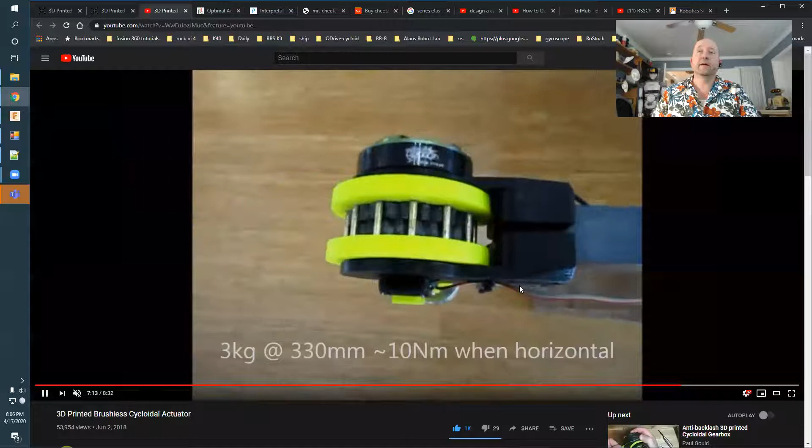And so I've been playing with this concept on and off for about the past 2 years, and then something shiny came along and I dropped it for a while. But this one you're looking at here, this earlier example, with a 12-volt power supply, 5 amps, is able to provide a force of about 10 Newton meters.

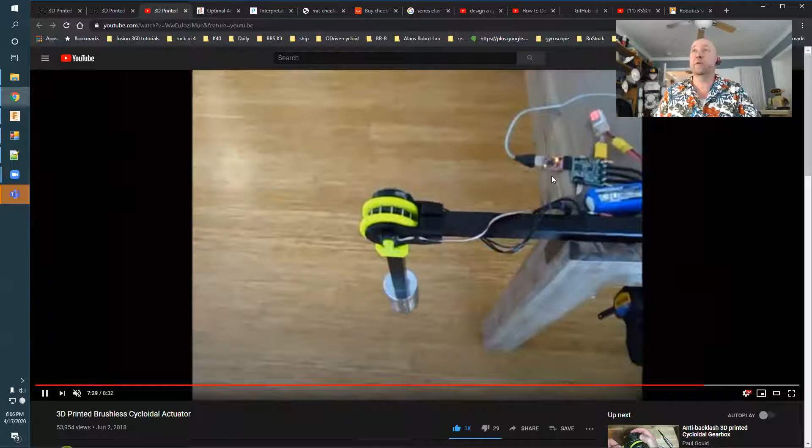And this brushless motor and this cycloidal gearbox isn't operating anywhere near its max. He's only giving it about 1/4 of the total power. And I don't think he's done any destructive testing, but the point is these things are small and potentially very powerful. It sounds like a lot of fun.

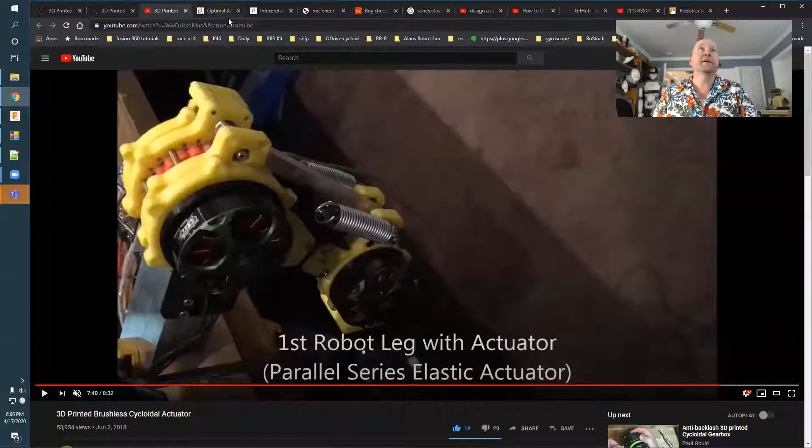So a couple of things have happened since then. This is from late 2018. Boston Dynamics Spot Mini, I'm sure everyone's seen, and it's been on my Christmas list for the past couple of years. And there's another set of people out there, MIT. They've built this thing called the MIT Cheetah. And they've published all of their work, all of their design. I don't know much about the mechanics of the Spot Mini, but they've published a lot of information about the Cheetah actuator.

And let me go ahead and dig into this a little bit. So this is how they're doing it. It's a very wide and shallow brushless motor, and they're a lot more complicated than the normal motors, but potentially a lot more powerful based on their weight and their size. And in this big space in the middle, they put a 6-to-1 planetary gear reducer, just right smack dab in the middle of the brushless motor.

And then they use these aluminum framing components on the outside to mount it to stuff. The entire motor is very narrow and very strong, and really impressive. These are smaller versions of the Spot Mini. I did not think ahead to get a video clip of it for people that have not seen the MIT Cheetah before. But for those of you who have not, it's smaller. It doesn't look to be as complicated. It's more of a project than a product right now, but it seems to have all the same walking capabilities that the Spot Mini does.

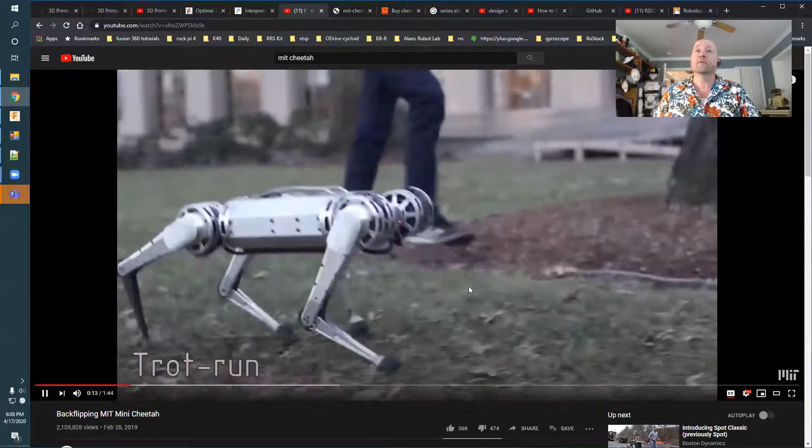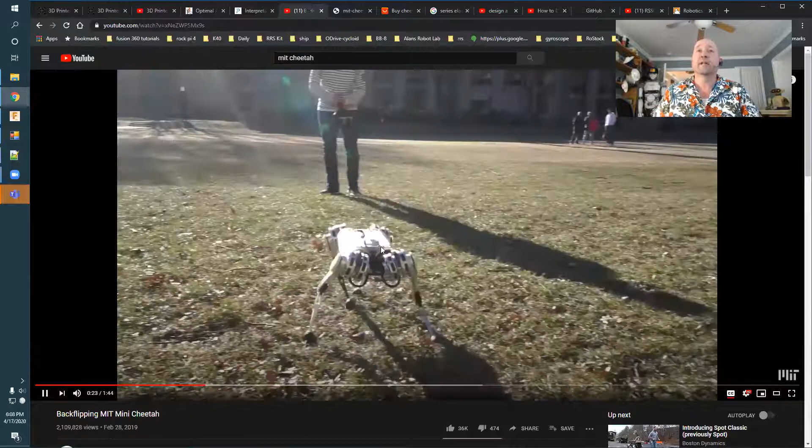So super cool. If you Google search or YouTube search, you'll find some people who are reproducing this. And so this guy's been in various stages of development for the past couple of years as well. Agile, adept, quick, just a lot of fun. And there's some additional papers on how they do what they do. Now, something very interesting came up when they started publishing designs about this, and it's kind of all wrapped up in the same kind of concept.

You want something strong, you want something light, and we've been able to do that since honestly the mid-'80s with standard gear reductions and powerful motors. The thing that has been a lot harder to do is to intuit how much force you're applying. So it's one thing to apply power to a motor and exert a force and have things move around, but it's a whole other ballgame to say, okay, how much force am I applying?

Because if you know the position of something, you can calculate out over time your speed, your acceleration for second order derivatives. You can characterize everything about the motion, but between load sensors and force sensitive resistors, there's really not a lot you can do to identify your static load or how much force you're applying.

And you can approximate it by using a current sensor, but it's inexact because depending on how high your gearing is, and a lot of these super powerful motors have very high gearing, inertia is not the right word, but there's a certain minimum force that you have to be able to apply before that's enough force to backdrive it. So that minimum amount of force represents the lightest force that you could conceivably measure on the gearbox, and that's just the way things were.

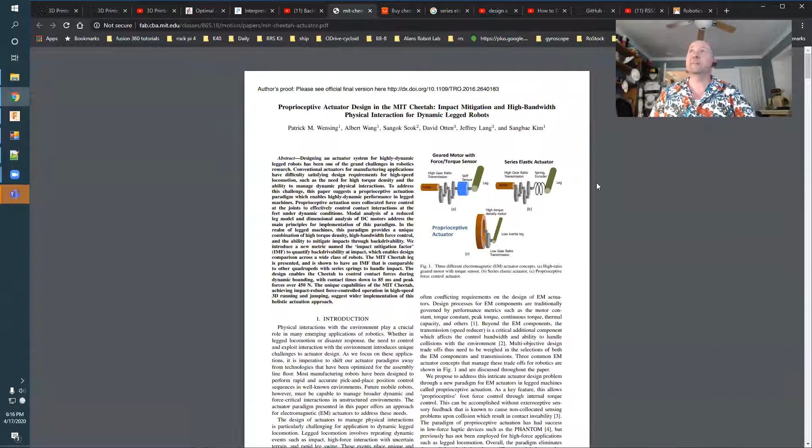It's out of my price range. You need 12 of them to do an MIT Cheetah. And just recently, they've started to sell completely assembled MIT Cheetah designs. So the stuff is out there and it works. It's pretty cool and coming down in price. Still too expensive for me, so I'm trying to see if I can approximate something with 3D printed hypocycloidal gears that maybe won't burn up or melt.

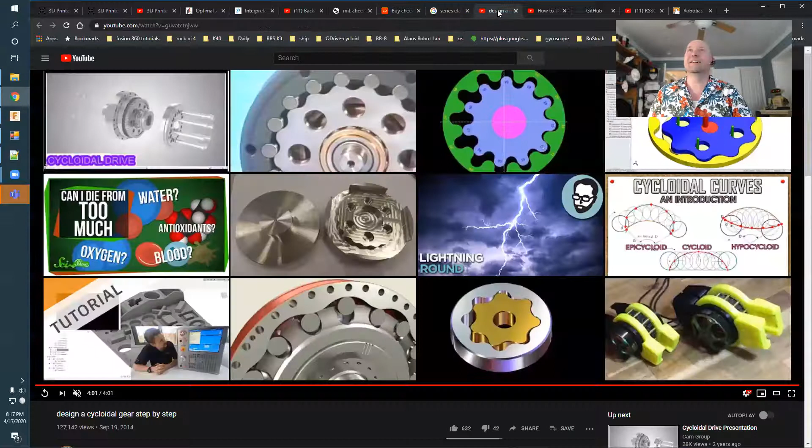Quick question, Alan. Yeah. The MIT Cheetah that you can buy off of AliExpress, does that include the software as well? Is that like a full package? Is that a 100% faithful replication of the MIT Cheetah? Do you know? Oh, they can't deliver to the United States. I wonder why. I know very little about these people that are selling these. I don't want to call them pirated copies, but these aren't MIT approved reproductions.

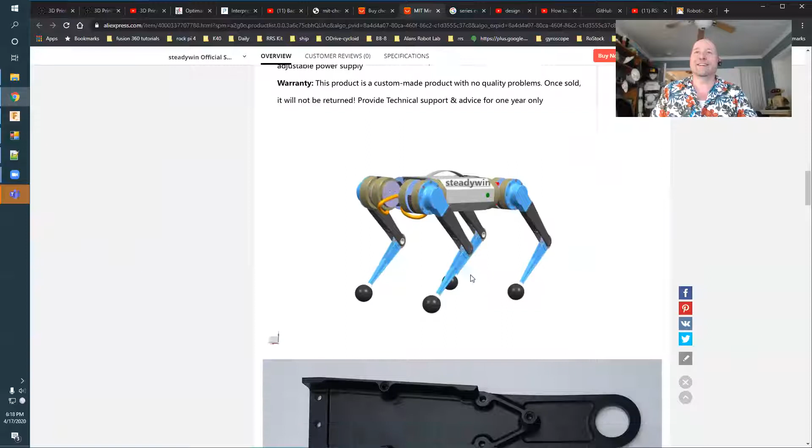I doubt. Oh, there's an operating system on it. So it looks like they're including some sort of software package. I haven't checked up to see what MIT has published on it or what they're doing. Apparently you get one 3,000 watt adjustable power supply. That's pretty beefy. But the manufacturing quality looks pretty good. These are, what do you think? These are cast aluminum parts.

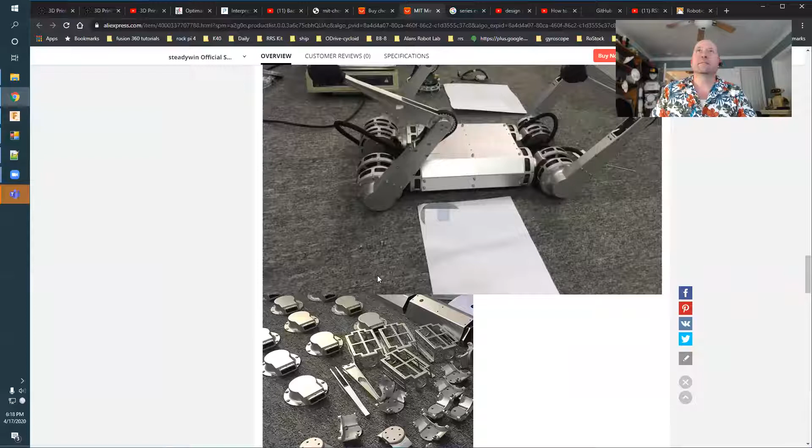So yeah, anyone with a spare 12 grand plus change and can ship to an intermediate country on the way here. I can get it in gray too. That's pretty cool. Have it go to the Cayman Islands. All right. So these guys won't ship to the U.S. How about these guys? Oh, yep, these guys will ship to the U.S. So that looks like so much fun. If I had a spare 13 grand burning a hole in my pocket, build your own robot. It's a knockoff, but the quality might be reasonable. All those parts. Yeah, it looks pretty good.

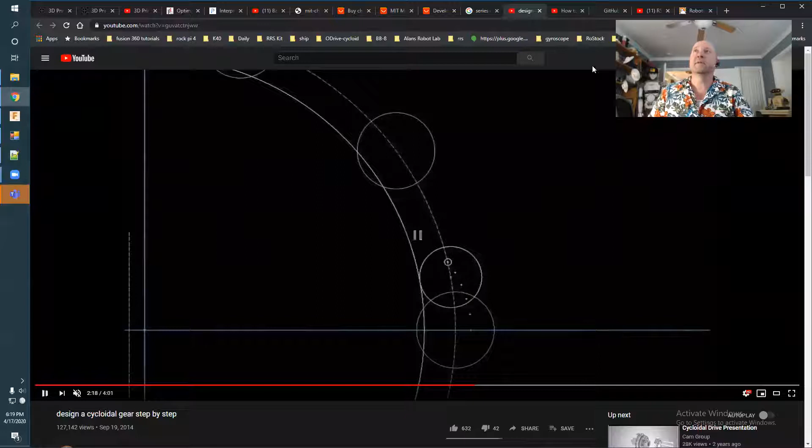So with all that as a background, here's why I'm doing what I'm doing today. There have been other people on YouTube and instructions on how to design hypocycloidal gears, either by recreating the hypocycloidal path and then plotting that out over time, or using some stuff in Fusion 360 to do that. So I've done both of these, and I'm not going to bore you with them. They're super tedious, but they work.

When I was watching this guy's video a few weeks ago, in the comment section, someone came out and said, hey, why don't you just use the cycloidal gear solver on GitHub? And the comments aren't coming up right now, so we'll skip that part. And lo and behold, 4 years ago, someone wrote and published a cycloidal gear generator in Visual Basic, I think. And so what I did is I went ahead and grabbed that.

And sure enough, you can plug in all these different parameters, the roller distance between the center of the gear and the outside, the number of teeth, the radius of the rollers, to create a hypocycloidal gear profile that you can then import as a DXF file. Super awesome. So now I can think, right? So I can go in and say, okay, what would 10:1 look like? What would it look like if I increase the diameter by 2 millimeters?

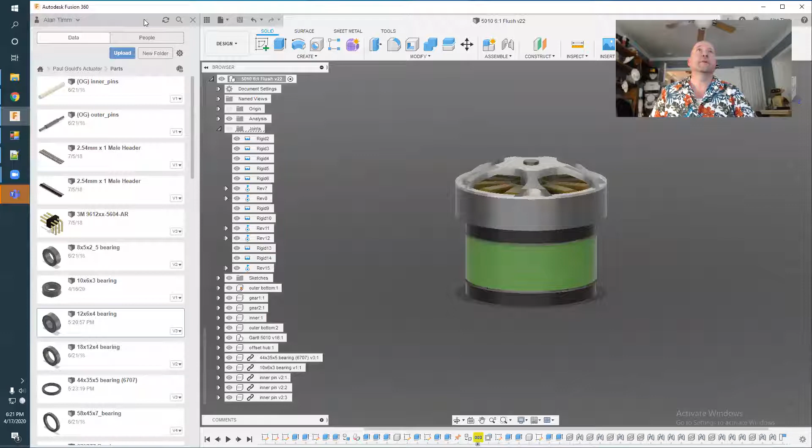Instead of plotting it out over the course of 30 minutes every time I had a change, you can just use the calculator and then export that solution as a DXF. I'll just save that one as RSSC. So far, so good. Love that. Now, on the Fusion 360 side, pretty much all you have to do, and the point of this talk is symmetry, drawing, extrusion. This is just all the build-up to kind of a little window into what I do sometimes.

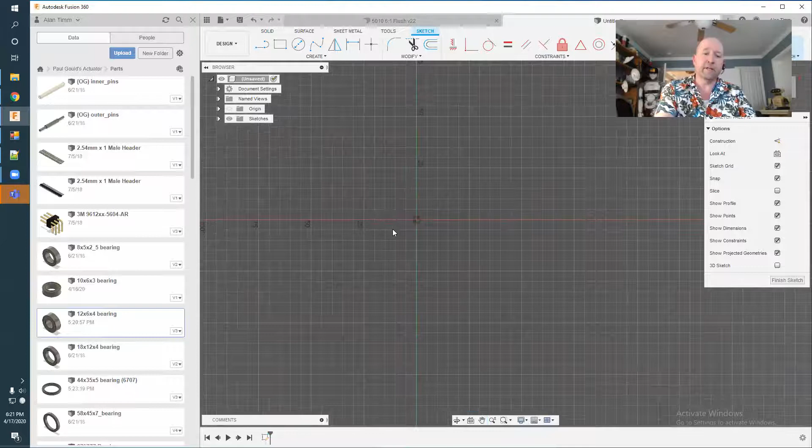Let's go ahead and create a new sketch. Now, just from experience, I know that the reference diameter of my gearbox, let's go ahead and make that 50 millimeters. Let's go to dimension and do that.

Oh, let me show you something really quick. Now, on the screen, can you see my chat? Can you see my video window? Am I moving that to the center? Can you see that? Okay. We can't see your video window, but we can see the video window that Zoom provides at the top. Okay.

All right, so let's do this. So am I front and center now? I should have pinned my video. Did that work? Your video is front and center. Okay. Yeah. Your face is front and center. All right. Small, real pretty.

All right. So to skip to the end first, I'm going to go ahead and move the camera down so you can kind of see what I'm working on now. So this is an example of the hypocycloidal gear that I'm going to show you in Fusion. So this week I did a couple of designs. I printed things out. The tolerances on this one aren't great because I rushed it, but in principle it absolutely works. So let me show you what's going on here, and I'm going to show you each of the components until we get bored on the live stream.

But here in the center, you can see the input shaft. I drew a little arrow with a Sharpie. And on the outside, I drew a little marker so you could see the progression of the output shaft. Now in the middle there are these hypocycloidal gears, and I added in a little reference mark right here so that you could kind of see how all three of these work together. Now this is a 6:1 hypocycloidal gear reducer, which means that for every 6 turns of the input shaft, the output shaft turns once. So we're going to trade by a factor of 6 some speed for some force.

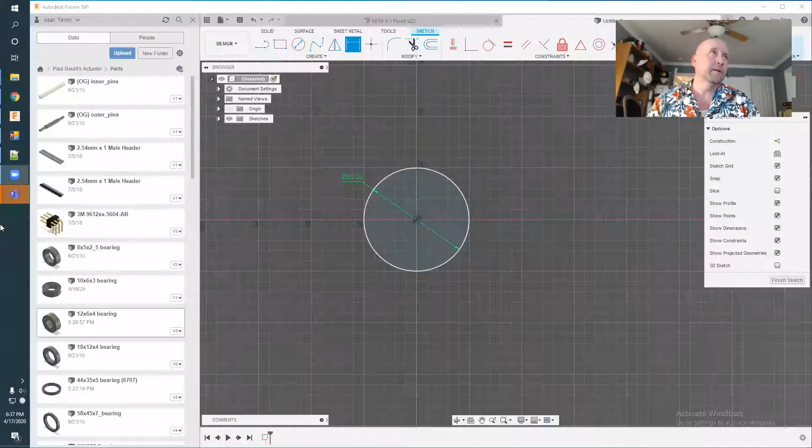Yep, so there's 2 answers to that question. I'm going to switch back to share screen here for a second to show you what I think I know about it. So for just something that looks metallic, we're going to skip to that guy a little bit later. There are a couple of different filaments available that have a small amount of metal embedded into it. They're heavier. They polish up like brass or copper, or aluminum, but they're not really used for strength. It's just for looks.

Let me see if I can find here. Let me switch forward onto this guy. So this is the stuff that you and I would be able to get a hold of. Let me see if I can find an example of an output object. Oh my gosh, the talking head is not going to show us. Because I'm thinking, some of these nanomaterials, carbon-based type stuff, could wind up being very, very strong, but yet maybe 3D printable types of filaments of some sort.

Yep, and there are filaments that have embedded little chunks of carbon fiber, which are very strong and very stiff. But again, it all depends what you're using it for. Let me give you an example. When the carbon fiber filaments first became available to 3D printers, and they're still a little bit more expensive, they were really expensive when they first came out. And they tend to tear up the inside of the brass nozzles for 3D printers.

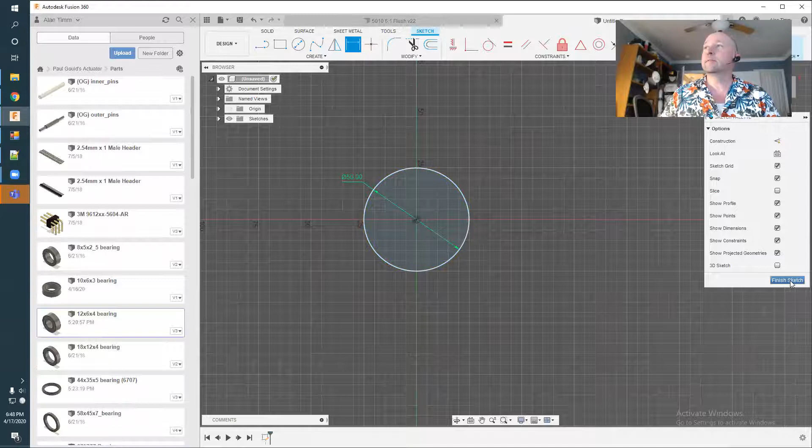All right. So to wrap up the talk on Fusion, we went off on a couple of different tangents. Sorry about that. Let me switch back to the screen here. What I wanted to show you was symmetry, employing patterns in your designs to save time. Now, I'm going to skip forward a little bit on this one. I'm going to say my reference diameter for the gearbox is 50 millimeters. And we're going to call that reference diameter, just so I can remind myself of how big the gearbox is supposed to be.

From there, let me save the design. We'll call this RSSC gearbox tutorial. And I'm going to create a new component. This is going to be for the gear, and that'll be made active. So what I have here is a project, and in that project I've created a new component and made it active. That means everything I'm doing is gear related. It's a way of organizing your work when you're doing something complicated with multiple parts. Now, let's go back over to my gearbox generator.

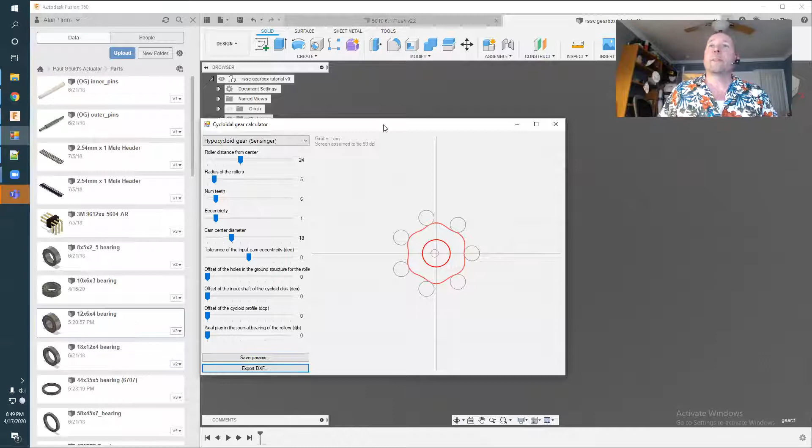Now, this is the gearbox I'm currently working on. These are parameters that I've already set up. From a couple of iterations, I know that I want the centers of these posts to be 24 millimeters away because that fits in my 50 millimeter frame. I know that I want each post to be 10 millimeters in diameter or 5 millimeters in radius.

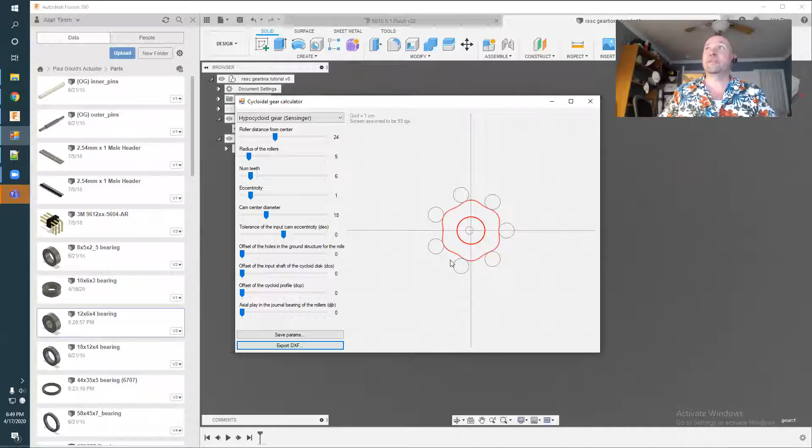It's a 6-to-1 gear reduction, so there should be 7 of these posts and 6 lobes in the gear. And as you change these around, it redraws the gear in real time, which is super awesome to see what these things look like, way faster than going through and hand drawing them.

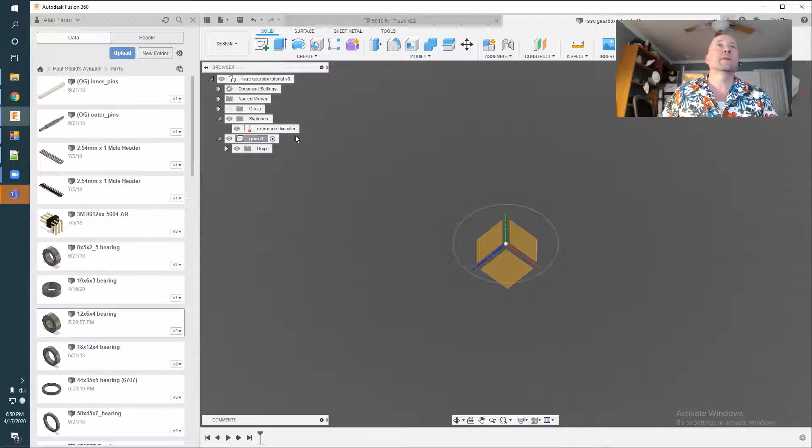So what I'll do is I'll export that design. I'm going to call that RSSC just for sake of the demo. And it's going to export that design as a DXF or a drawing type file. And from there, in our gear, let's go ahead and expose the origin and do a new sketch. And in this sketch, let me move some things around so I can see them over here. There we go.

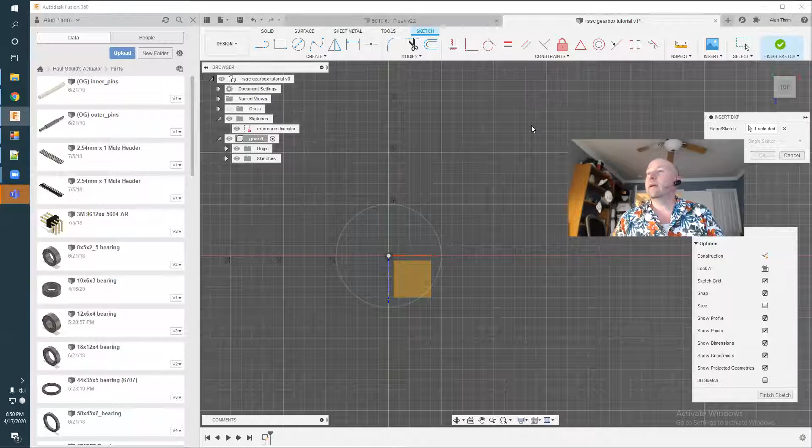We're going to insert that DXF file that we just generated. So I'll go back over here. Hopefully I'll remember where I stuck it. And it's going to pause for a second as it crunches it. There's lots of individual line segments. It takes a couple of seconds for it to import everything. I get a warning that the DXF file is unitless. It doesn't contain units. So I think it's millimeters, but let's see.

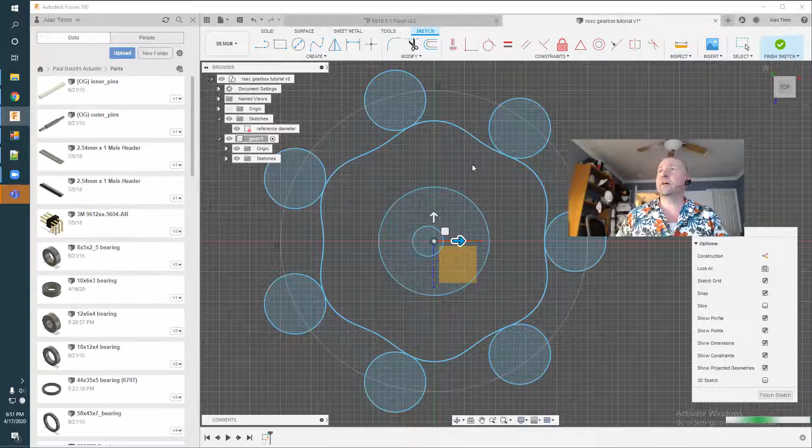And here we have an import of that DXF file. Now I want to point something out to you because sometimes it works and sometimes it doesn't. Now, when you cursor over a closed solid, let's see, I think we want it just like that. I'm going to go ahead and click on OK. And after a couple of seconds, it'll fully import that DXF reference file into this sketch. Now it's still chewing on it because it's a really inefficient way of getting it in here, but this is great because this gets us most of the way of where we need to be.

All right, so I'm going to turn off that reference diameter circle for a minute. Now, when there's a closed shape and you put your cursor over it, it'll change color. That means that this is a closed circle. In theory, we could extrude it and it would be a solid. Fantastic. We actually can't use these because even though they look like circles, they're not imported as circles, so we'll ignore those. But check this out.

When I put my cursor over the gear profile, that doesn't happen. And that doesn't happen because it's actually made up of several thousand small line segments, and there's an open segment somewhere. So I can't extrude this. I can't directly use this shape to design a part to 3D print to create my gearbox.

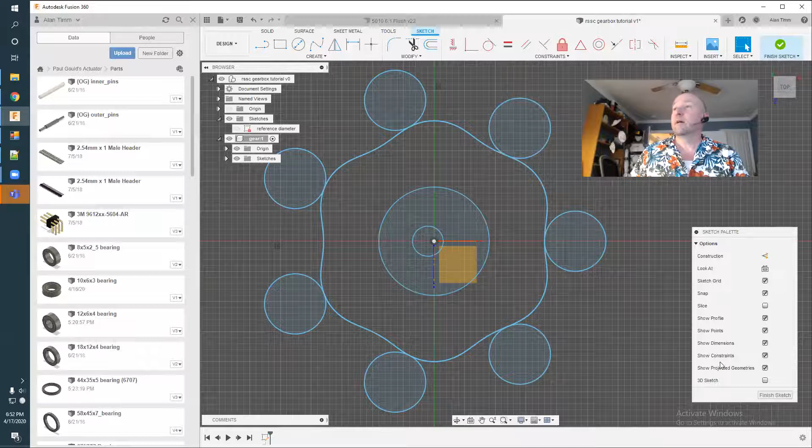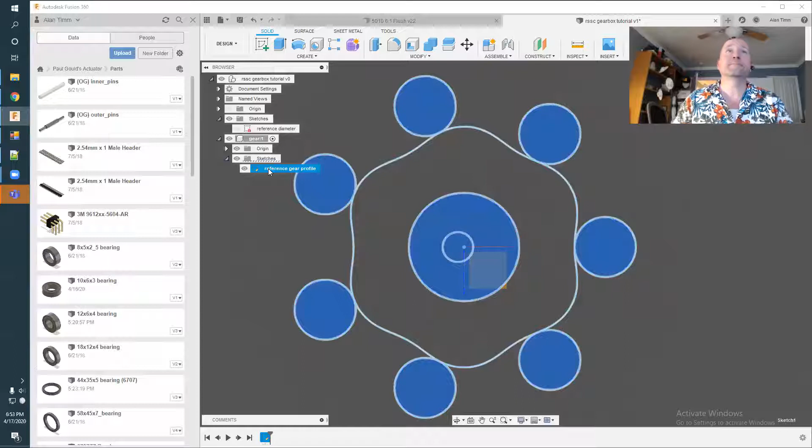But that's okay because we are getting better at Fusion 360, and there's some things that we can do to work around that. So I'm going to call this sketch where we imported that file reference gear profile because it sounds cool. And so that's going to be a sketch underneath the gear. And same thing, you can see that I could, in theory, extrude each of these circles, but I can't extrude the gear profile. So let's talk about patterns.

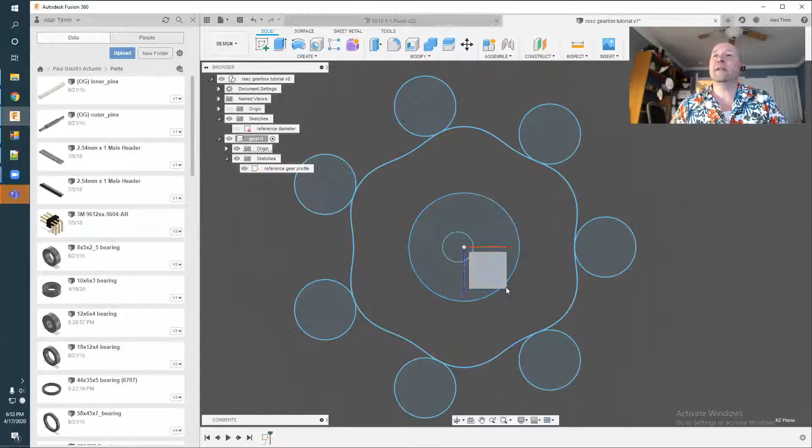Let's go ahead and create another sketch. So this is a different sketch; we'll go ahead and turn the other sketch off. So we have this reference sketch with some stuff on it, and then we have our new sketch 5. This sketch 5 is going to be our actual gear profile. And we're going to use patterns to recreate that gear without drawing several 100,000 points or whatever it is around the entire gear.

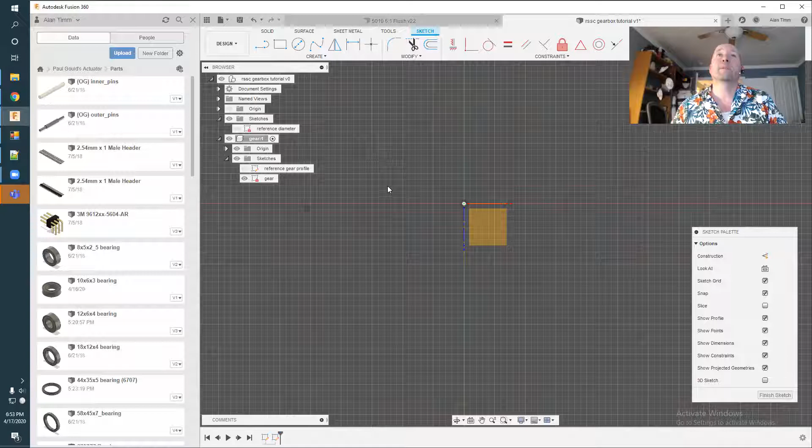So what do we know? We know that this gear is a 6-to-1 gear reduction, which means that the gear on the inside can be divided into 6 equal pieces. So if we reproduce 1/6 of that, we could then use a pattern feature to get the rest of it. So that's what we're going to do.

I also noticed that as I put my cursor over that line, I've got these guiding dots for the beginning and end of each line segment. We can actually use that also to project those dots to get the gear. So these are all the pieces we have. Let me show you how I can use these tools to actually reproduce the gear. So I always say start with what you know. So we'll leave this gear visible.

Now I'm going to draw a reference line. I'm just going to draw it up about this far. It's going to be a vertical line. Doesn't matter how tall it is as long as it goes all the way to the top. Now I'm going to make this a construction line. What that means is that I can't use it to extrude anything there. It's just there for reference.

And by default, when I drew that, Fusion was smart enough to say, oh, you drew this line straight up. You must have wanted that to be a vertical line, so it'll apply a vertical constraint to it automatically, meaning I can just change the length of it, but I can't move it anywhere else because of that constraint. So that's some of the things that are happening that you get for free when you draw a line that's straight up and down.

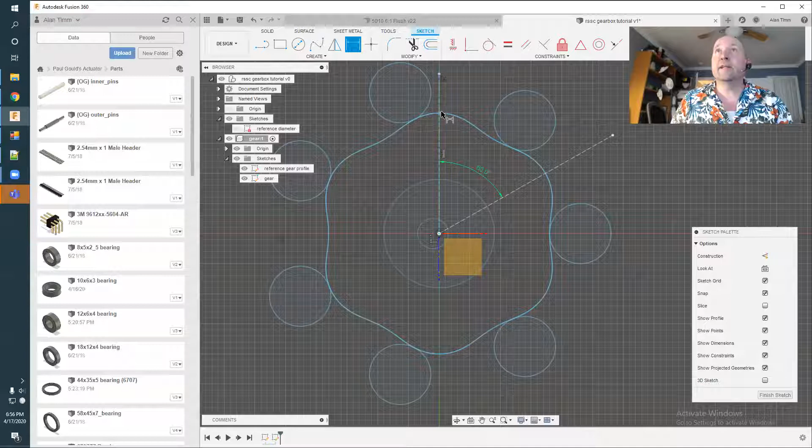Now, I actually know what the answer is supposed to be, but that's because I've done this a couple of times. I know I want 1/6 of 360 degrees, right? So 360 degrees is an entire circle. This has 6 lobes on it. I want 1/6 of that. So you could either grab a calculator or just type in 360 divided by 6. And eyeballing it, it looks like this is at the center of this lobe. This is at the center of that lobe. So I think we've got a good start.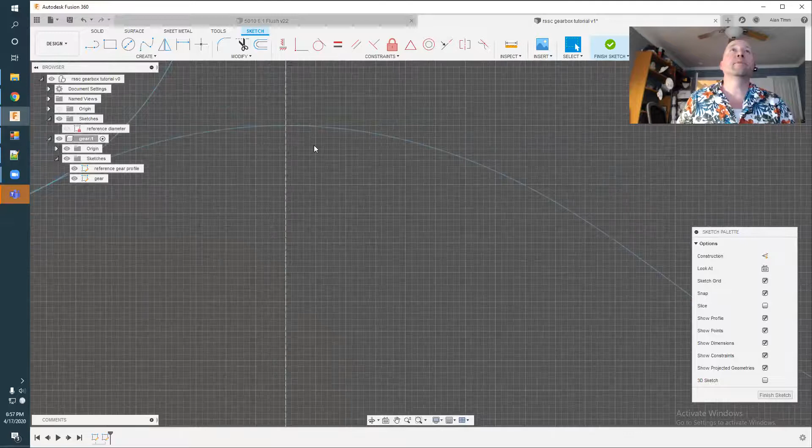Now the next tool I'm going to use is, let me embiggen this a little bit so we can get a better look at this section of it. There we go. I'm going to use the Fit Spline tool. And what I'm going to do is I'm going to grab, oh, sorry. We're going to do one more thing. Those lines in blue are lines that are showing forward from a different sketch. I actually want to grab some points from that to recreate the curve. So in order to do that, I'm going to use a feature called project.

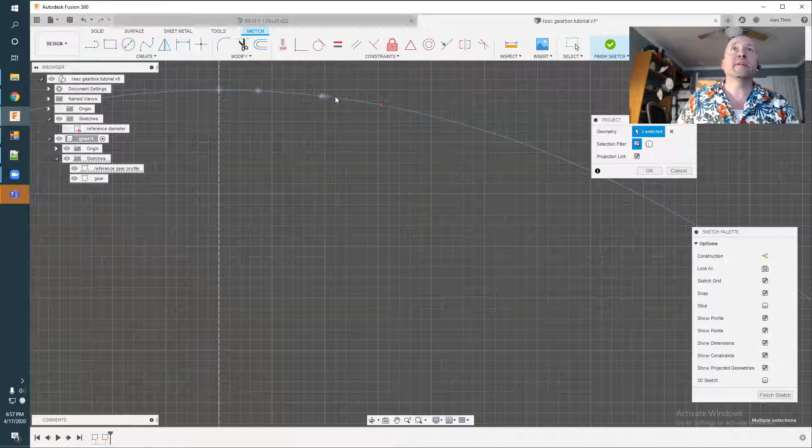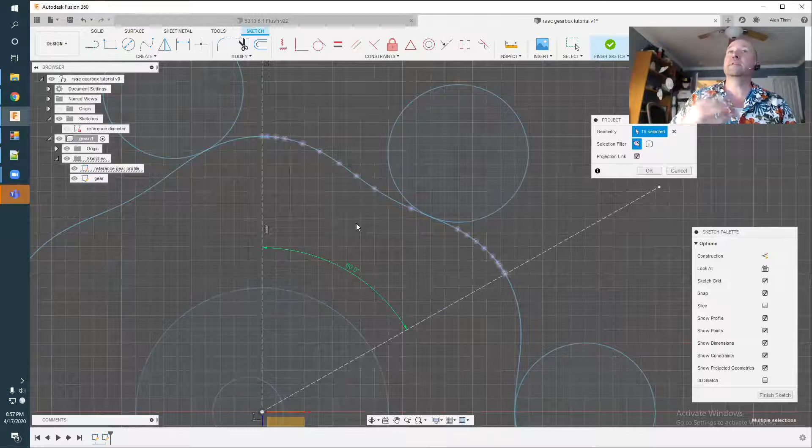And what I'm going to say is, I don't want the entire line projected, but I want some of the dots projected so I can reproduce the curve. So I'm going to really quickly, I'm a little bit more careful than this, this might be off by a couple of microns, but you get the idea. I'll grab like 6 or 8 or 10 or 20. Project these points from that reference sketch. Let's grab that and that. So we're going to project those points from that reference sketch onto my new sketch. And once that's done, I can get rid of the reference sketch. And we've got this rough profile of some points that approximate that curve that we want.

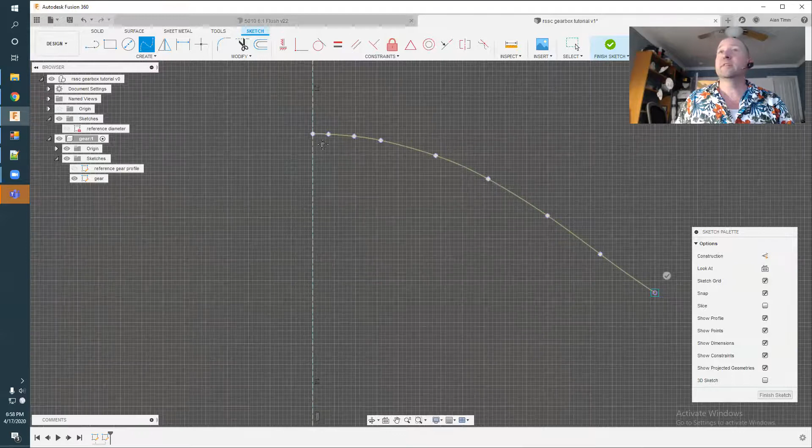Now I'm going to use that spline tool, and I'm just going to go in and connect the dots. And as I do this, the spline tool is going to approximate the curvature required to create a smooth transition from one point to the next. So it's not going to be absolutely perfect. The resulting curve will probably be off by a couple of microns, but that's okay because my printer is only accurate to about 100 microns. And we're doing all of this because the imported shape was not a closed figure.

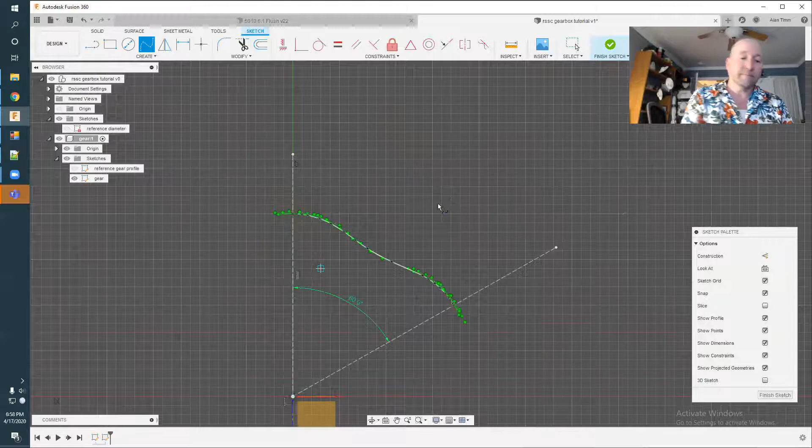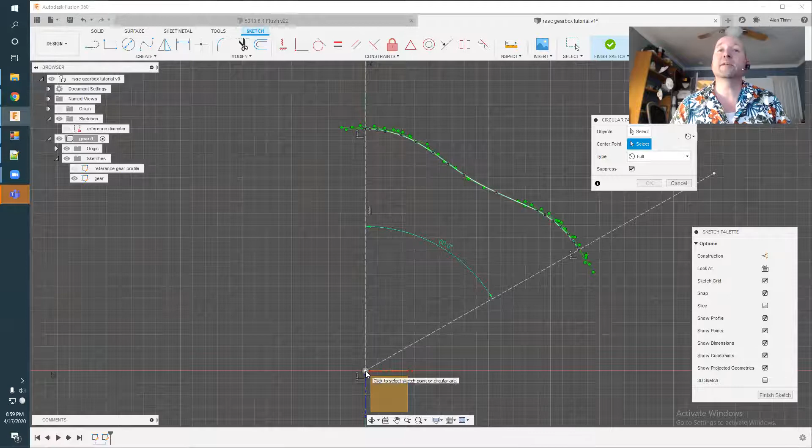All right, so now we have a line. Not too useful yet, moving my cursor around. We don't have any closed shapes that we can extrude. But now that we have 1/6 of that profile, we can select it and go over to the Create menu, and we can create a circular pattern. So we'll select that. It needs to know 2 things. It wants to know what the center point is, so I'll just select the center of the origin of the sketch. And it wants to know what I want to repeat in a circular pattern, so I'll carefully select this profile.

And when I do that, you can see a couple of things happen. It's like, okay, well, you want to complete a complete circle, here's what I've got for you. So it says full, and it is creating 3 copies so far. So there's one right there, one right there, and one right there. That doesn't get us all the way there because we know that we have 6 lobes. So let's change that quantity from 3 to 4, 4 to 5, almost there, and a 6.

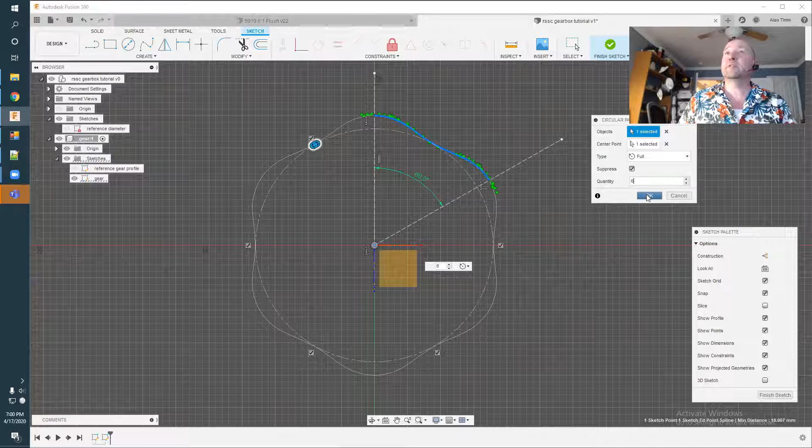And if we did everything right, if this line segment began and ended exactly on the 60-degree mark, and that represented 1/6 of the lobe, and we reproduce it 6 times, Fusion 360 should be smart enough to connect the dots and create a solid. And as you can see, when I move my cursor over the resulting circular pattern, Fusion 360 recognizes this as a potential solid, a closed sketch, and I can then extrude it into a shape.

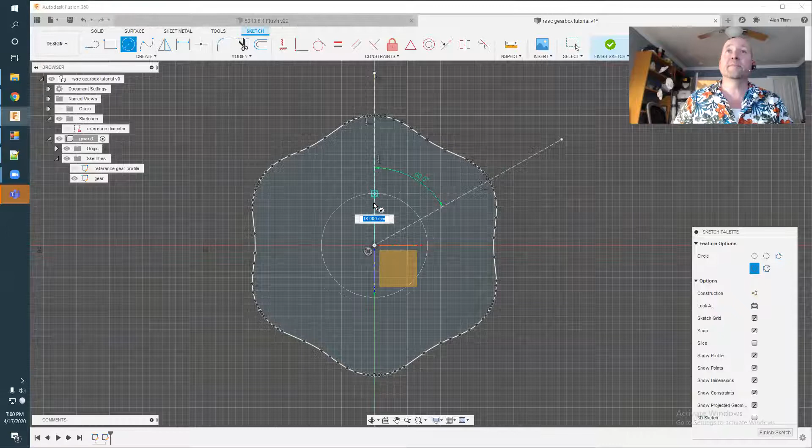And depending on how much time we were going to take, there was a whole bunch of other stuff I could bore you with. But for right now, let's just give this a hub. And my bearings that I'm using are 18 millimeters in diameter. So let's mark this one off as an 18 millimeters. And let's use that circular pattern one more time.

I'm going to draw another circle. It'll snap to the center line. Let's just draw it to some random thing. Let's call this one a diameter of 8. And we'll grab that feature, sorry, not that feature, that sketch entity right there. Click on Create, Circular Pattern. For objects, because I already selected it, it says one selected.

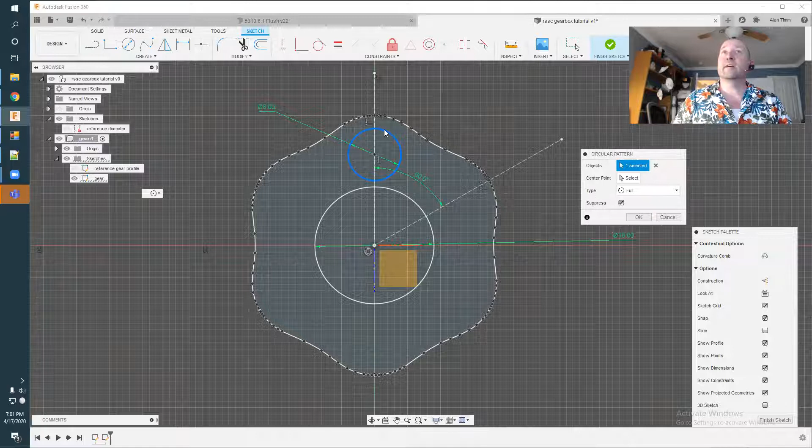We'll move over to center point. I want it to rotate around the center or the origin. And let's do it in front of every lobe again. Let's do 4, 5, and 6. And you'll notice that this profile now looks very similar to the gears that I printed out.

Now, and this is something, it's intuition and experience, right? When you're going through and creating and designing things, if there's only 2 parts to it, you could always just brute force it and put them in individually. And when people are first getting started in Fusion 360, they may individually define 6 different lead lines and draw 6 different circles and define each of these because they knew they needed 6 and what their ratios were.

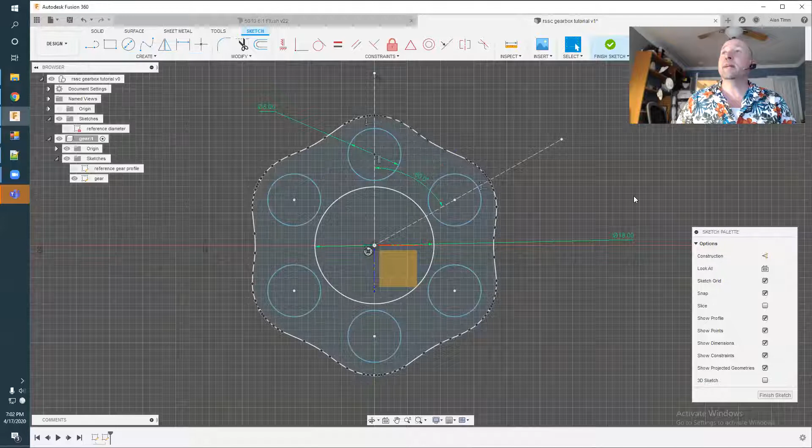And that totally works. But once you know there are tools out there like rectangular pattern and circular pattern, you can save a whole bunch of time by only creating or recreating the geometry that you absolutely have to, and then using those tools to fill in the blanks for you. So now when I put my cursor over this, everything turns shaded. That means that it's potentially a solid.

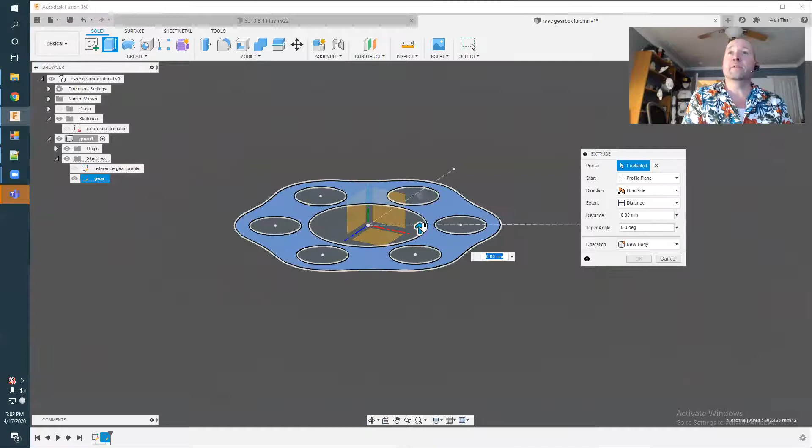I can click on Finish Sketch and then cursor over. We still get that opaque, meaning that we could extrude this if we wanted to. I'll right click and select Press Pull. And once you do that, you can grab the bars to move things up or down. I happen to know that I want this gear to be 5 millimeters tall. So I could either drag this to 5, or if you know the number in advance, you can just type it in. And then hit OK, and bada bing, bada boom.

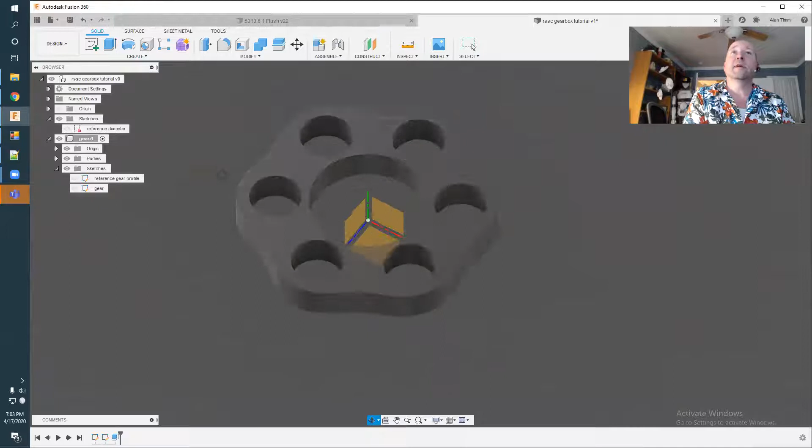You have a cycloidal gear that was sourced from an imported DXF file. That DXF file was incomplete, but it had enough information that we could reproduce it by using some of those points as a reference. And this is exactly how I created, extruded, and then exported and printed out the cycloidal gears that I showed you in the gearbox I did earlier.

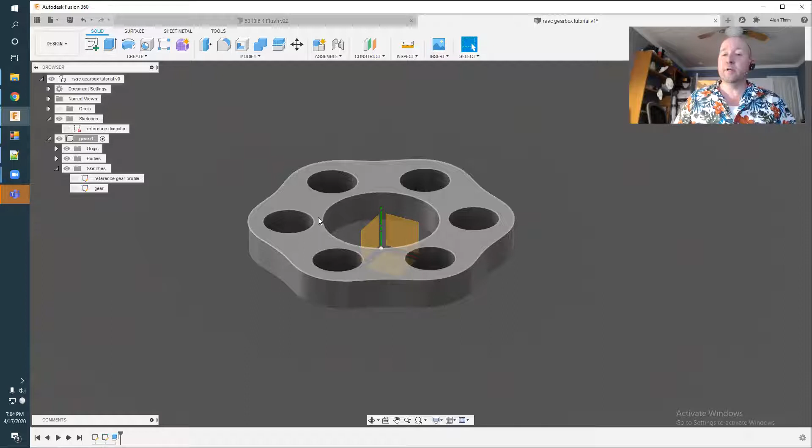So that's how far I've gotten so far. I've got some more tweaks to the gearbox, and eventually I have to get to the electronics. But I'm fairly excited to see when I get this done how strong it'll be, not only based on the materials that I'm using, but also the limits to the power that I can push through it, knowing that even with PETG, I probably can't exceed 60 degrees of temperature for the driver board or for the brushless motor.

The other thing that I haven't seen a lot of information on the interwebs is that these brushless motors, let me go ahead and switch back to camera view as we wrap this up. These guys are designed to have a rotor attached to it. And that rotor pushes air and that lifts up the drone. But that rotor also pushes a large amount of air through the motor as it flies. Perfect, elegant, beautiful design for drone motors and rotors that self-cool.

Well, when you're using these for robotics, the only airflow you get is the turbulence from these little tines right here. So I'm really curious to see how hard or easy it is to keep these things within temperature based on the amount of power you push through it.

Oh, that's amazing. So that's what I've got so far. I'm sure you can design something to blow air into it. Yeah, and there are a couple of designs similar to the MIT Cheetah where they've actually crafted a small 40 to 60 millimeter fan whose only job is just to blow air over it to keep things cool.

I have an idea about that though. Robots tend to hold perfectly still, right? You move to a position and then you stop. It's that stopping that's the biggest problem, because when it's stopped, you're applying power to the motor to maintain that position. There's nothing to dissipate the heat buildup because there's nothing moving.

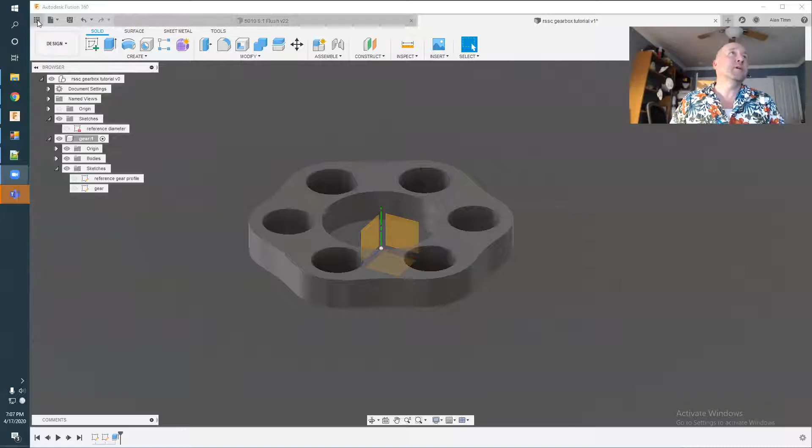And the good news is, because we have Fusion 360 and tools like this, I don't have to build it with my hands to figure out if it's going to work. As I make changes to the gearbox, I'll mock it up just to see how things will play out. Now, this design I'm showing you, I'm not super excited about. It's just my version of doodling.

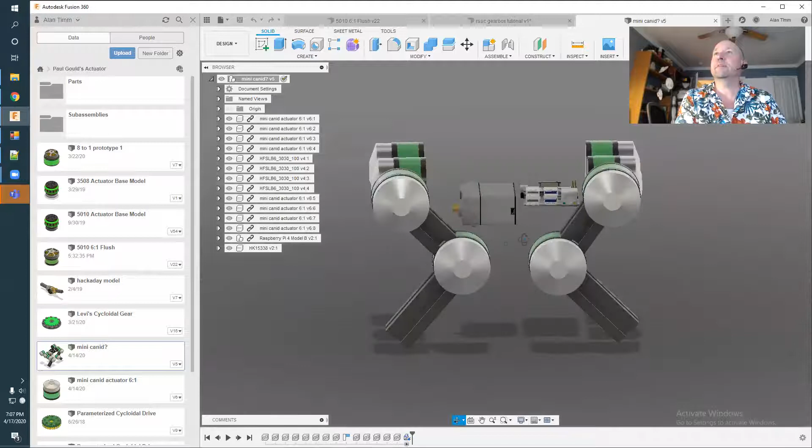But to take a simplified version of those boxes and insert them in the model and say, okay, if I were to build this, would there be enough room? What would the shape look like? Fusion 360 makes this kind of analysis and doodling really easy. And the more I look at this, as cool as it looks, the less excited I get, because this type of robot and design has been done a lot.

But you never know. The gearbox that I'm making right now is pretty small, so maybe it'd be fun to do a small version of it that was cheaper than $12,000. Those are the kinds of things that get me excited about building things out, not to follow someone else's footsteps, but to try something a little bit new.

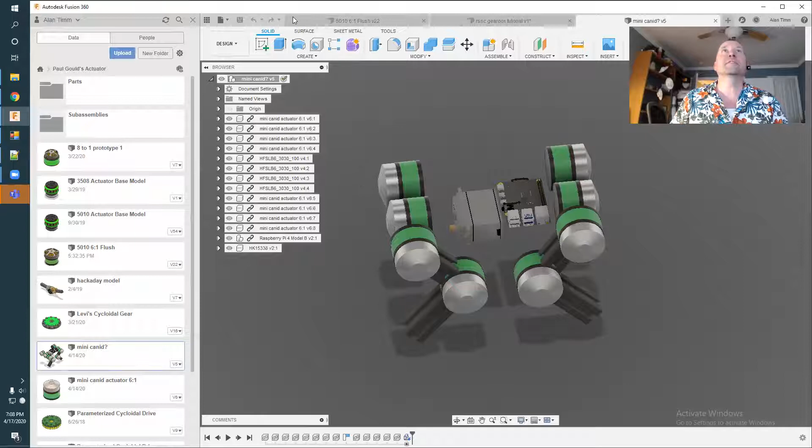Did James Bruton use linear actuators, right? Yeah, so for those of you who aren't already idolizing James Bruton from XRobots UK, you should. He is working on another version of a quadruped. If you'd like to stay on for another minute, I'll walk you through what he's doing so far. Let's see, James Bruton. As you can see, I may have searched for him once or twice.

You need to share your screen. Oh, it's always some mundane detail like clicking on the share button. Sorry about that.

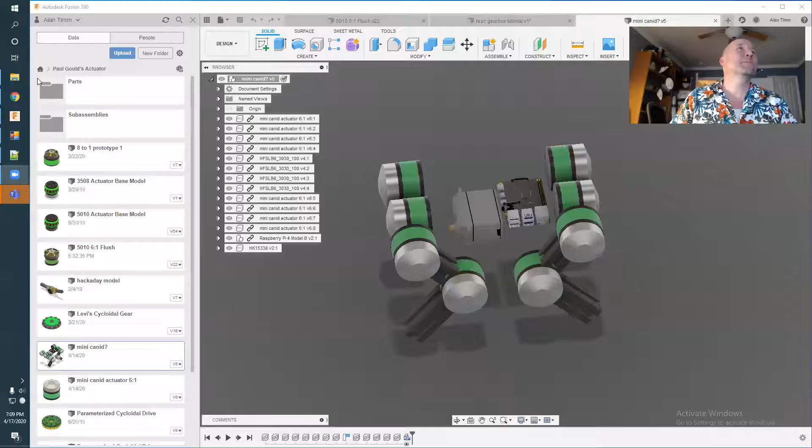Have you looked at using one like Proto Labs to injection mold your device? You know, I haven't looked at them for the robots that I'm working on, but I did look at them when I had briefly thought about mass producing plastic cases for the Raspberry Pi 0 and 0W. And I did submit some designs and get a couple of quotes for it.

And you end up spending a whole bunch of money to have the mold made. And then depending on if you're doing small or large scale, the molds cost less or more. And then they charge you by part, depending on your production run. I haven't really imagined doing anything in large enough scale to where that would make sense.

And that's about as far as I got. I know the larger the molds are, the more expensive they are. But how cool would that be? Oh yeah, the tooling on that is expensive. They actually make metal tools to put together. Some of my customers do that, and I go to the shop to work on their machines, and they got that stuff there, and you should see it. All that stuff was made and cut out, so there's a lot of tooling costs just to have something made by plastic.

Yeah, and there's a lot of stuff. If you want to get the design right the first time, there's a whole bunch of rules on how to design, not 3D printed, sorry, injection molded parts so that they can be molded successfully and pop out of the mold. And there's different prices for the molds based on the finish quality, if you want a mirror finish or a rough cut. But one of the things that I kept hearing about when I was looking through this was,

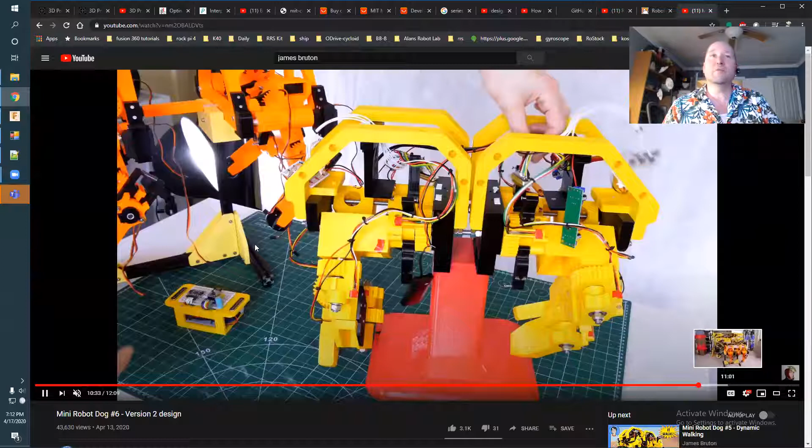Let me switch back to screen share just for a moment. James Bruton has been doing something very interesting. Well, he always does. So he is designing yet another super awesome robot. I'm going to pause it right here. After his big dog, he is building something smaller. And he's actually using standard metal gear servos. In earlier videos, you can see in the frame where he's using a standard metal gear servo, and then using a 3D printed 2-to-1 gear reduction to make these things strong enough to move around a beast like this.

Now, before the brushless motors and the 6-to-1 planetary gears and current sensing, in the 90s, the MIT lab patented a different solution to this called series elastic actuation. What that means is that they would insert a spring between your output shaft and the actual output, and then they could use the spring constant and measure spring deflection to approximate how much force is being applied. So you have more moving parts, but you can do it with materials that were available in the day. What James is doing right now is something very similar to that.

Now, I'm not 100% sure if he can detect force unidirectionally or bidirectionally, but what he's done is he's attached the output shaft of the arm to a spring, and he's using a Hall effect sensor to measure the spring deflection as force is applied to the leg. Theoretically, this would allow him to do all kinds of really exciting and interesting calculations about force, motion, and acceleration, and how they apply to movement strategies.